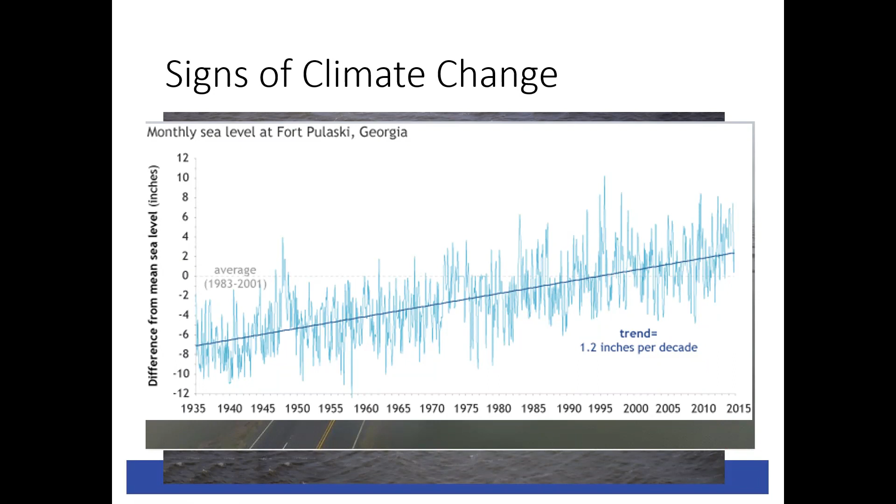So how do Kevin and I and the research teams that we work together, what is our goal? Our goal is to engage the community by taking a look at some of the modeling and geospatial modeling we're doing of their communities related to flooding and hurricane winds within their communities, bringing that back to the community and talking about solutions. How can we potentially mitigate against these hazards that we're modeling through mitigation projects, through resilience actions, so that their communities are resilient going forward in the future.

We then always bring the education back to the community, talk to them about how we did the modeling, what do the numbers mean, how can you then use the information going forward, and trying to educate the community on how we've put this information together. And then come up with best practices. What are the things that are going to be best utilized to help mitigate these risks into the future? What are things to do today? What are things to be thinking about as you grow as a community going forward?

So in phase 1 of the research, there was an initial hazard assessment along the Georgia coastline, and we collected some data for hazard and building data there. And what we learned from that research, we brought into the phase 2 piece, where we looked at current hazards and risks to the Georgia coastline. Then we looked into phase 3 after what we learned in phase 2.

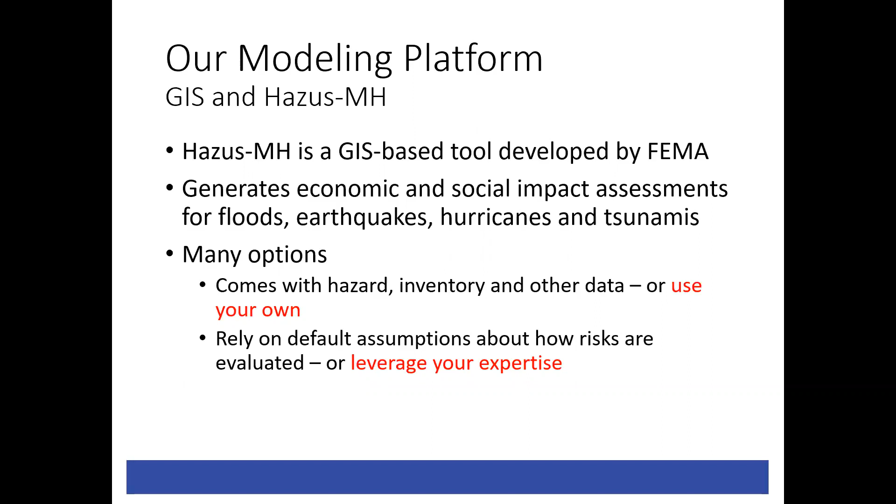Also, in order to really understand the full risks to a community, you have to understand a little bit more about what's impacted. So the buildings, the people, and so you can also use your own information on buildings and people and bring that into HAZUS-MH. So, well, what is at risk? Well, certainly we understand buildings would be at risk, and infrastructure, the environment can be at risk, and also populations.

And so when you're wanting to describe what's exposed to a hazard, you really want to know the questions you're asking, the availability of the data, and the capacity of our modeling tools and techniques. So for this project, we really focused largely on the buildings and infrastructure because we have very, very rich data along the Georgia coastline for those two aspects. And also the relationships between flooding and wind and how those impact those two. And also we looked at populations for our project.

So how did we create our buildings for this project? We used CAMA data. So this would be data that we often get from a county assessor within a community where we are tracking buildings and properties throughout the community, and we can grab building characteristics from that data. So we also have to then locate those buildings in space. And so for some communities, you may only have a parcel footprint, or the land ownership footprint, whereas in other communities, you may be able to locate that right and directly on the building.

And so from this information, we can get things like the name of the building. So maybe this might be a gas station, or it could be a grocery store, restaurant. The occupancy type, single family residential, the number of stories that the building has, and then of course the replacement cost. So in order to fully understand the impacts to any particular building or group of buildings, we have to have a little bit of understanding about the building itself in order to understand what the full impact will be.

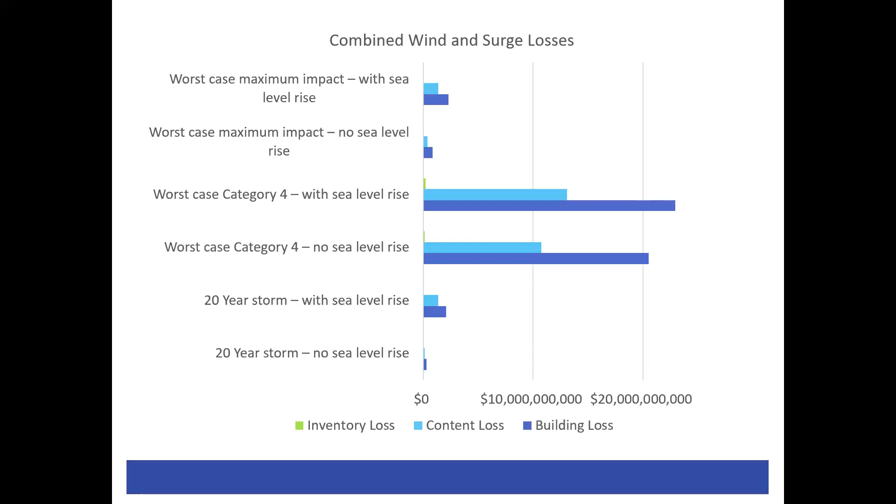When we look at the Category 4 hurricane, because it's impacting the coastline so severely, and you're getting all 11 counties impacted at almost a maximum level, it had the largest impacts, and those impacts were up around $20 billion in terms of that hurricane. So it'd be a devastating hurricane for the Georgia coast, whereas the Category 5 and Category 2, in the way that they approach the coast, were on the lower end, say somewhere between $2 and $4 billion for those two hurricanes.

So the reason that we started with this as an initial assessment, the issue with these types of assessments is they don't really drill down and get to the specifics of what any one community is going to be facing. Certainly you would understand what's happening in those communities right along that Category 5 path, but what about the communities to the north or the communities to the south? Those communities wouldn't be expecting Category 5 winds, they'd be expecting something much lower than that because they're further away from the hurricane path.

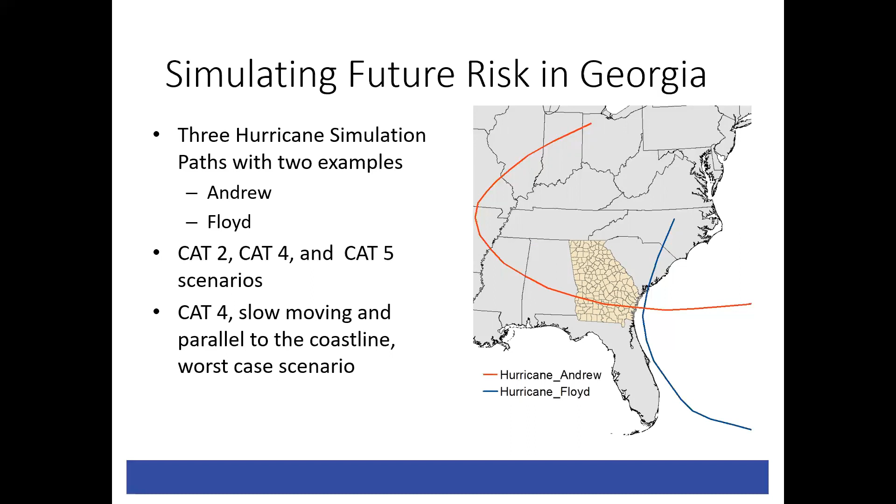And so in phase 3, we focused specifically on Tybee Island and Hinesville. And we wanted to look both at the current day risks from flooding and hurricanes in phase 2, and then future risks for Hinesville and Tybee Island in phase 3. So we developed a strategy for modeling the present day riverine and coastal flooding hazards, and then modeling also the impact of hurricane winds. We focused on riverine, or river and stream flooding, for the Hinesville area, and then coastal flooding and hurricane winds for Tybee Island.

And then we wanted to look at green infrastructure potentials for flooding scenarios, and then building mitigation scenarios for wind, so we could see what the impacts of those actions would be on both current hazards, but also future hazards. And so Hazus-MH, in conjunction with GIS analysis, were used to develop these hazards.

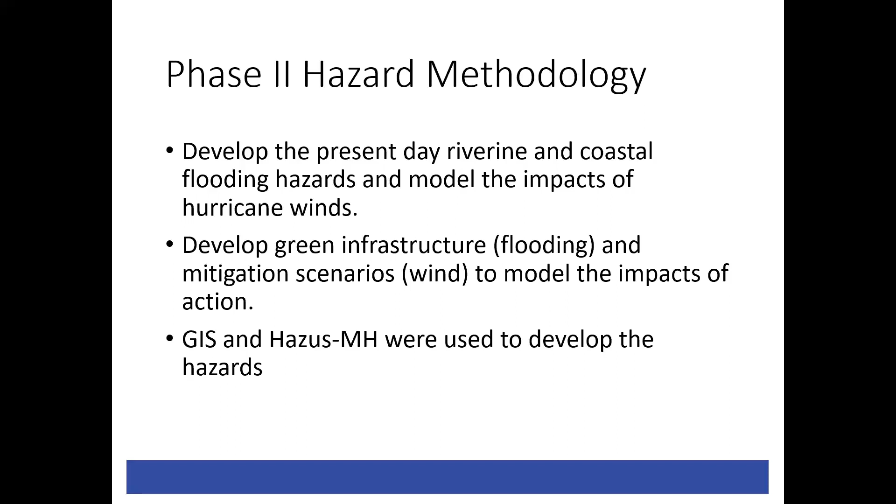So for Hinesville, in terms of the green infrastructure piece, we looked at just retention of about 10% of the existing water. And then we recalculated the stream flow. So what we're simulating here is not any one specific green infrastructure project, but the projects that would be implemented would retain about 10% of the existing water.

For Tybee Island, our green infrastructure project was simulating developing an 8-foot dune, which was the current, at the time, strategy for Tybee, was to have a dune that was about 8 feet and then had all the measures in place that would be protective for Tybee. An 8-foot dune for Tybee Island, and see what the potential for that would be if that was around the island and reducing the amount of storm surge.

And then for Tybee, we also simulated 10% of the homes would have shuttering on them. After talking with different people within the community, they felt like that 10% would be a reasonable number of people that could potentially, just given some sort of incentive program or just through awareness projects, maybe 10% of people would choose to do some permanent shuttering on their structure.

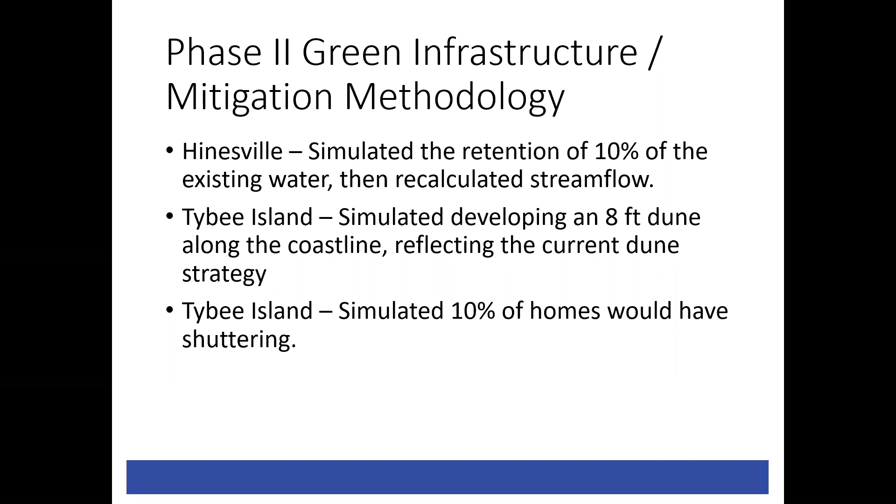So when you're measuring risk, what we're trying to do here is not measure a single event. We're trying to measure statistical probabilities. And so typically we hear of things like the 100-year flood or 100-year hurricane. The better way to describe that is the 1% annual chance, okay? And so the equation for that is if you had one of these happen in 100 years, that means you have a 1% chance of that event occurring. And so we were doing that. We're modeling the 1% chance, 500 years the same way. That's the 0.2% chance of that flood or hurricane occurring in any given year.

So you can have a 1% annual chance flood event in back-to-back years. I know Indiana did that in the mid-2000s, where they had 1% annual chance floods in back-to-back years. It just means that that's the statistical likelihood that you'll have that one flood event or have that one hurricane event. So because of the confusion of the terminology, we're going to stick to using percent annual chance rather than return period, but you can always go back and forth. So anytime you see 1% annual chance in this presentation, think of that as the 100-year flood or 100-year hurricane.

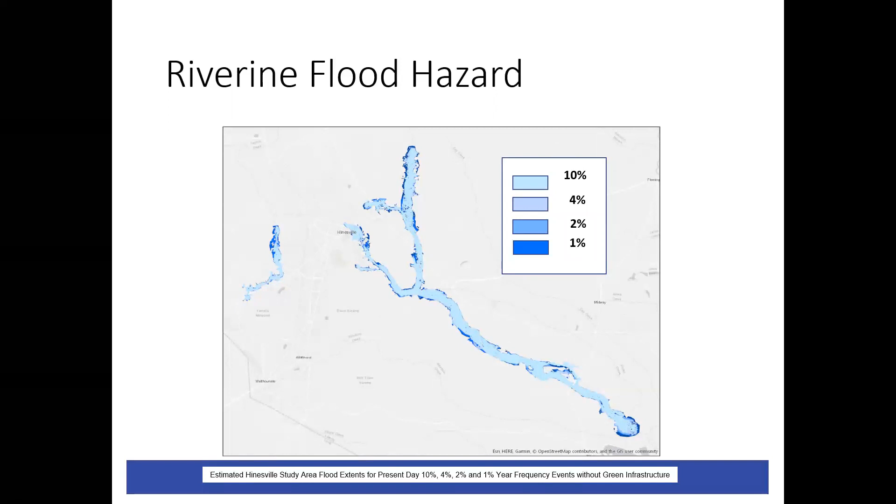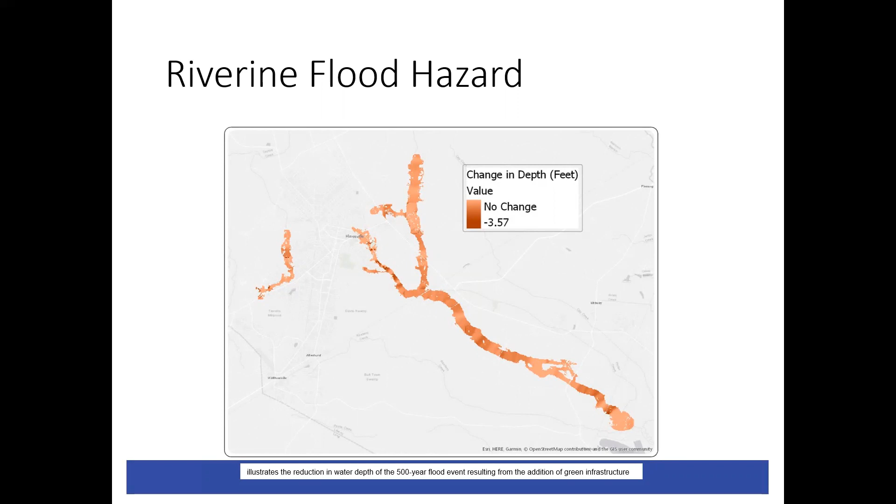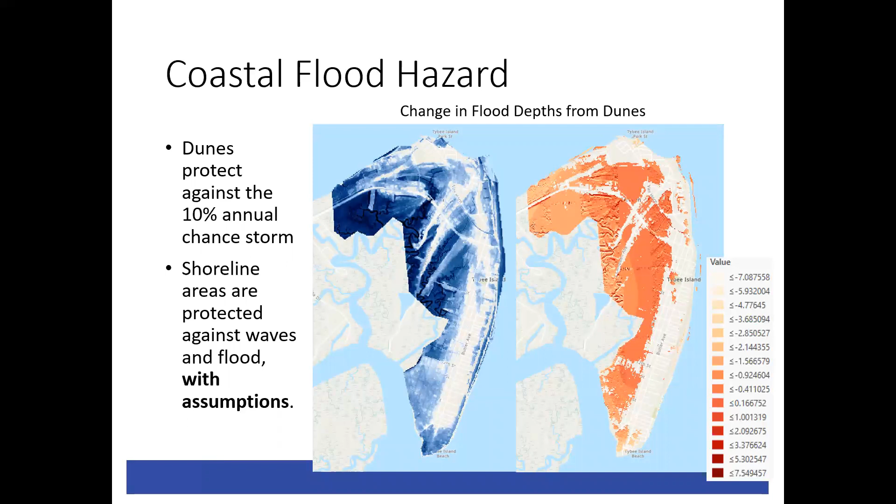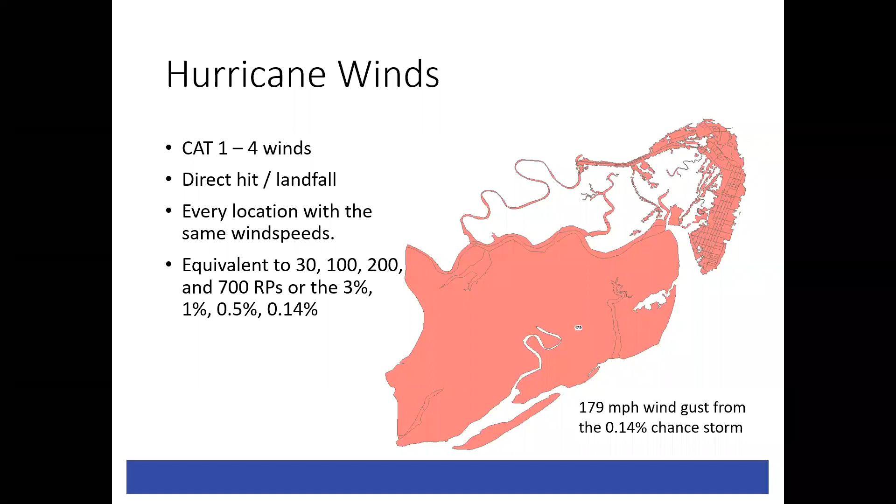So for this area, category 1 through 4 winds actually equates to the 30-year, 100-year, 200-year, and 700-year return periods. A category 4 hurricane for this particular area would be a lower chance event. It represents about the 0.14% annual chance event for a category 4 hurricane. So for the category 4 hurricane, the gusts can be as high as 179 miles per hour. And that's what the gust was, not the sustained wind, but the gust that we modeled for Tybee Island for that category 4 storm.

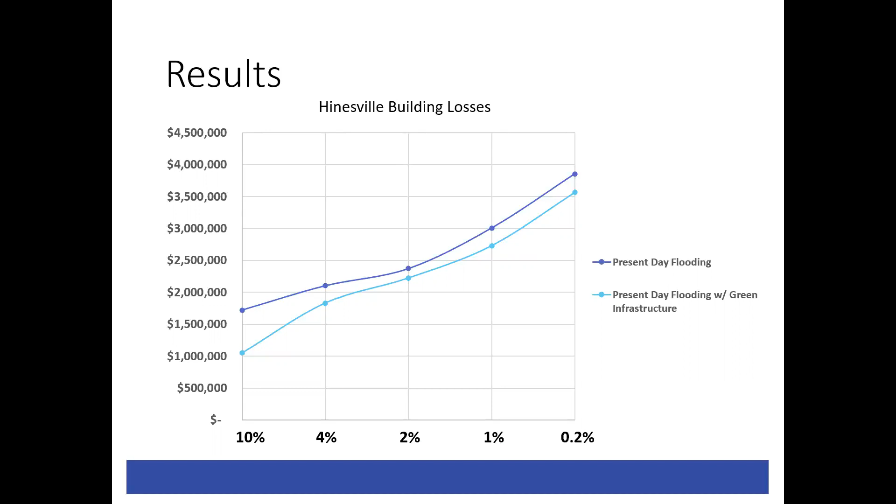We see similar but not as drastic reductions as you go up in the return periods. And partially that's because we're trying to mitigate against these, only removing the 10% of rainfall. When you get into the higher return periods, there's such a high volume of water in those cases, that small reduction isn't quite making as much of an impact as when you're in the smaller return periods.

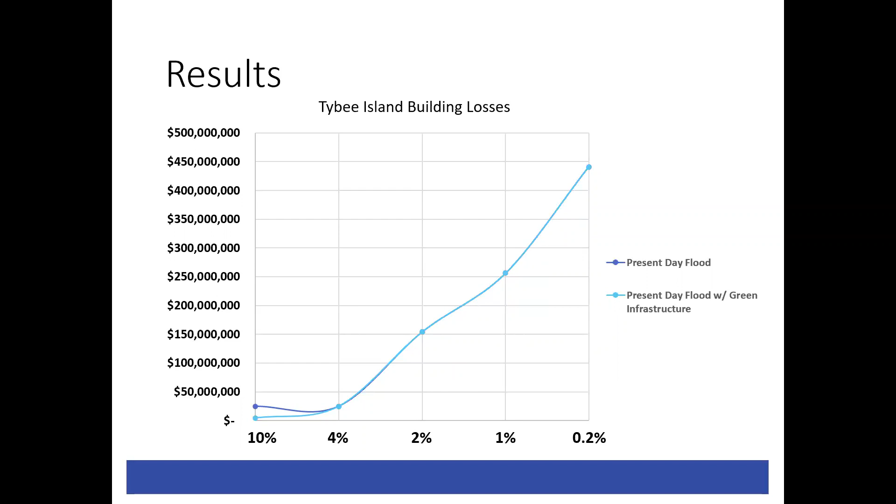So this is the Tybee Island building losses, and you can see that there's been a major reduction in the losses there toward the bottom at the 10% chance. But remember, the dunes are only going to protect against that 10-year storm, or that 10% annual chance storm. After that, the 8-foot dunes, the water is going to begin to overtop those. And so when you get to the 25 and 50-year return periods, 4%, 2%, those dunes are no longer going to be able to protect against those storms. And so at 8 feet, you're going to see the same present day flood with the green infrastructure. You're going to have similar losses in those cases.

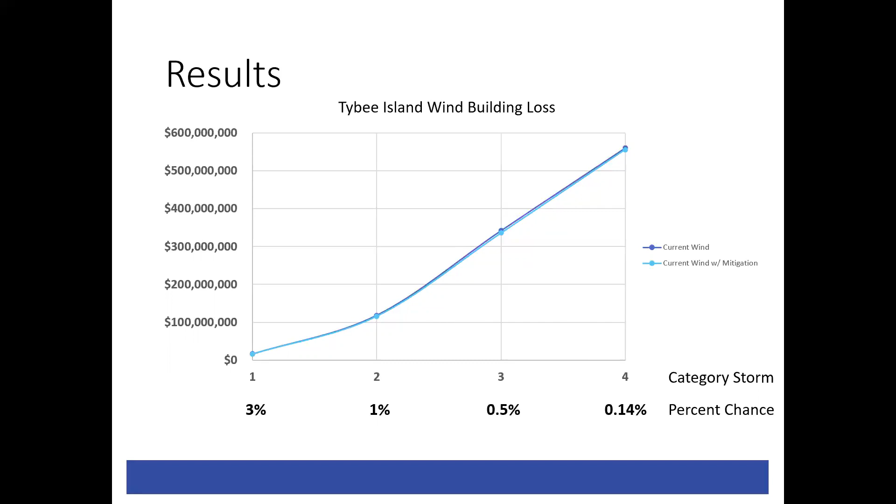Now for wind losses, this figure, because of the numbers that we have here, I'll just go ahead. So we estimated having about 10% of the structures reducing, and you can't actually see the gap there, but 10% of the structures are going to have those wind shuttering on them. And you can see as you get into the higher return periods, those make a bigger difference. In the lower return periods, you don't see as big a difference because the wind damage is not as great. But as you get into the category 2, category 3, and then the category 4 storm, you see what the benefits are from having the shuttering because the wind speeds, of course, are going to be so much greater.

So riverine flood damages remain the same throughout the flood magnitude, but the losses are going to increase as the flooding increases. So what we're saying there is the boundaries were remaining about the same. There wasn't much expansion into the floodplain as we increased the flood magnitude, but the flood depths were changing dramatically across the floodplain. And so we can see those flood depths getting deeper and deeper, and that's why the riverine flood damages are then changing throughout time.

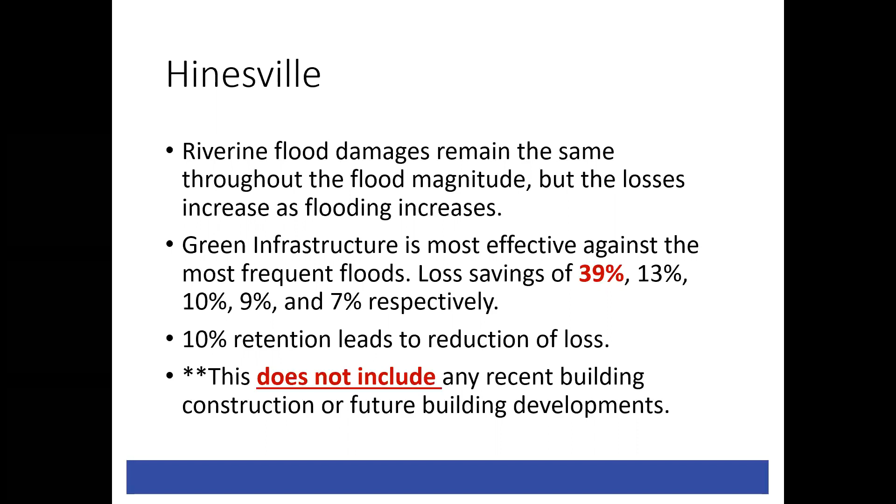The green infrastructure was most effective against the more frequent floods, so the 10%. With the 10% annual chance flood, we had a 39% reduction in loss. The reduction goes down, of course, as you get into the higher flood events, because there's just so much water that's there. So even at a 10% retention, we're seeing some pretty significant loss reduction, especially on that lower return period. We do not have any recent building construction or future building developments in this analysis. This is just the current building states that we had at the time of the analysis that we performed.

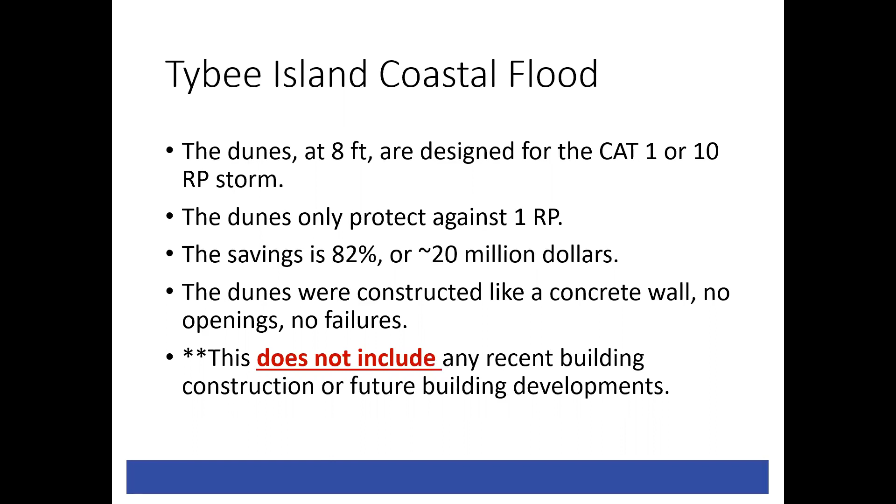So the dunes at 8 feet were designed for that category 1 or 10% annual chance storm every year. And so it only protected against that one. And so the savings for that one was about 82%, or about $20 million for that storm. So well worth having a nice dune system for that more frequent flood event. The one thing to keep in mind is these dunes were constructed like a concrete wall, basically. We constructed them to say this dune was going to be 100%, would not fail. There were no breaks or holes in it, and there were no failures. So we're showing a perfect scenario in terms of the stability of that sand dune. And again, this did not have any of the recent developments or future building developments. Those are going to be included in our future analyses.

And so 10% of shuttering leads to a minor savings throughout Tybee Island. We have an 11% reduction, 2.1%, 1.7, but that's millions of dollars saved. So even at a 0.8% reduction, the amount of dollars saved is huge on that category four hurricane. The reduction seems small, but it's millions of dollars. You can see that in the figure where those higher return periods, the amount of dollars was quite substantial.

So then in phase 3, this is where we're looking at future scenarios. We did 91 future scenarios between Hinesville and Tybee Island. We took the existing building stock and we looked at that for future scenarios. So what we're saying here is, if we don't do anything to our current buildings, they are sitting as they are, no new buildings, nothing. What do the future hazards look like for those existing buildings?

And then we modeled a future building stock. We said, okay, we're going to be looking forward to 2080. And we want to take a look at, okay, if our communities continue to grow, we want to have a future building stock to show those future hazards alongside future buildings.

We used future rainfall projections from the University of Wisconsin's Climate Center. We also got future storm surge information. We had sea level rise from Georgia Southern that provided to us that we could use in these analyses. We got information on impervious surfaces, current impervious surface area and future impervious surface area. And then we also looked at green infrastructure projects to help take a look at the mitigation potential.

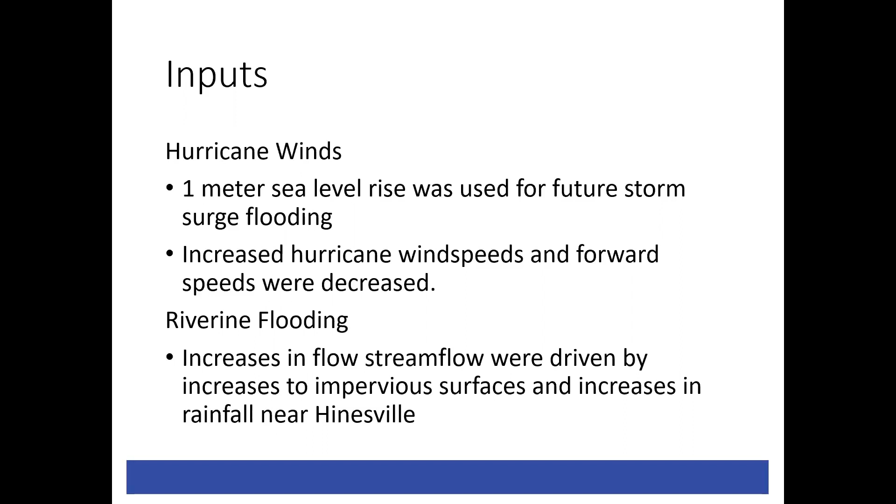We also changed the forward speeds, and we also changed the size of the hurricane based on some of the research that we have today. For riverine flooding, we increased the stream flow based upon what is going to be changed with respect to rainfall in the future in the Hinesville area. We also had increases to impervious surfaces based upon what we believe is a reasonable estimate in the increases in population there within the Hinesville area. So the impervious surface and rainfall changes are what contributed to the changes in stream flow.

So this is an example of the riverine analysis near Hinesville. The blue is today's 1% annual chance flood that we modeled. The pinkish and reddish areas, that's where that flood would expand into the future under our new scenario for the 1% annual chance flood. You can see the buildings that are in green, those are buildings that would be currently within the 1% annual chance flood. And then the purple buildings, those are the buildings that would be added to the potential future flooding that they may see in the Hinesville area.

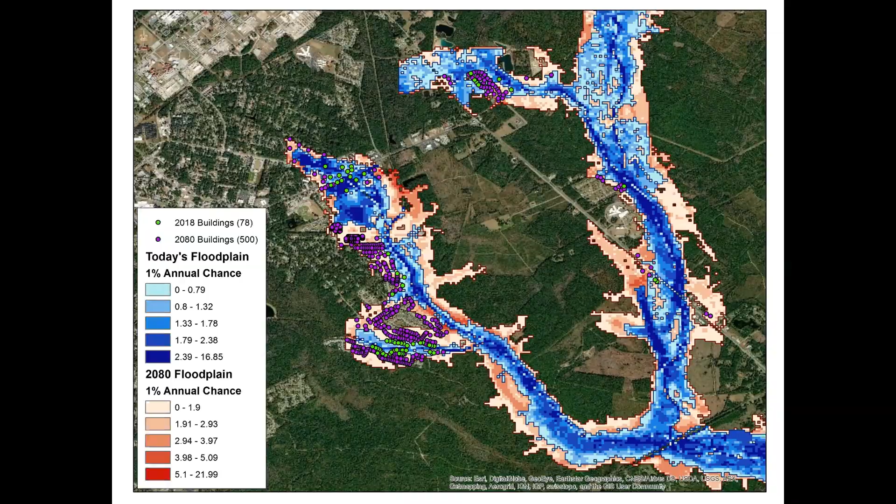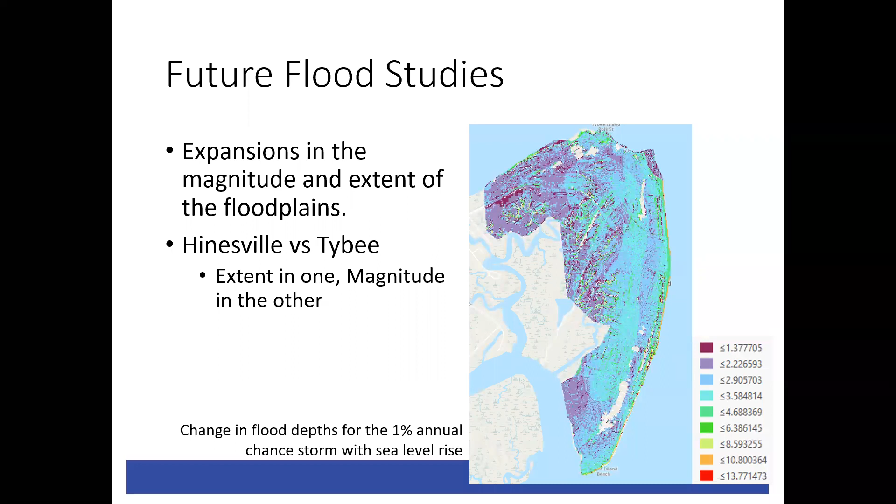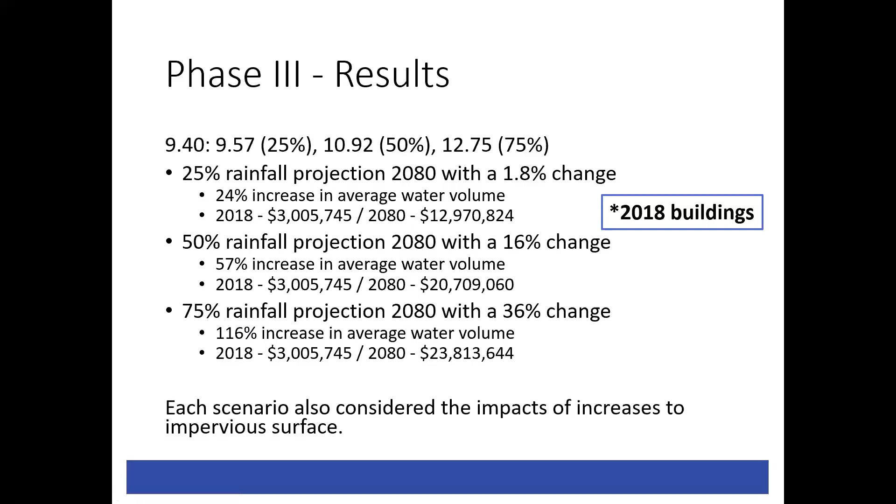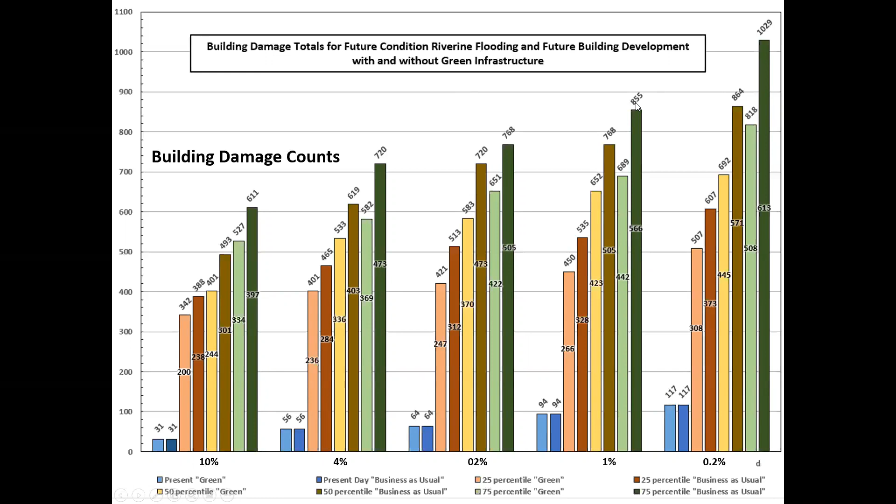And so the two yellow bars here is the same thing, except here we're looking at that middle of the road scenario, and then the final, the light green and dark green, that is the worst case scenario where we're really jumping up the amount of rainfall. And so here, with nothing in place and a worst case scenario rainfall event, 94 buildings jumps up to 855 buildings.

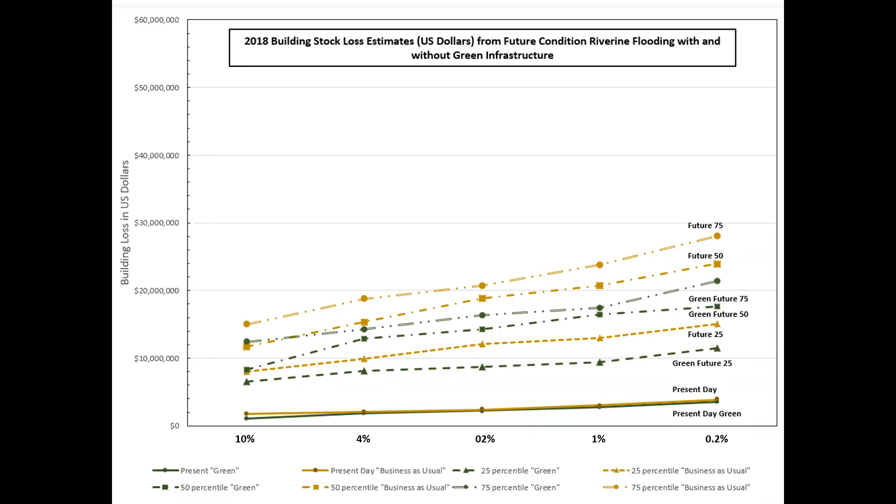Middle of the road scenarios, now we're jumping up into the 20 million, and then the worst case scenarios are up here, getting close to $30 million. So a major change from the $3 million jumping all the way up to $20 million for those areas around Hinesville.

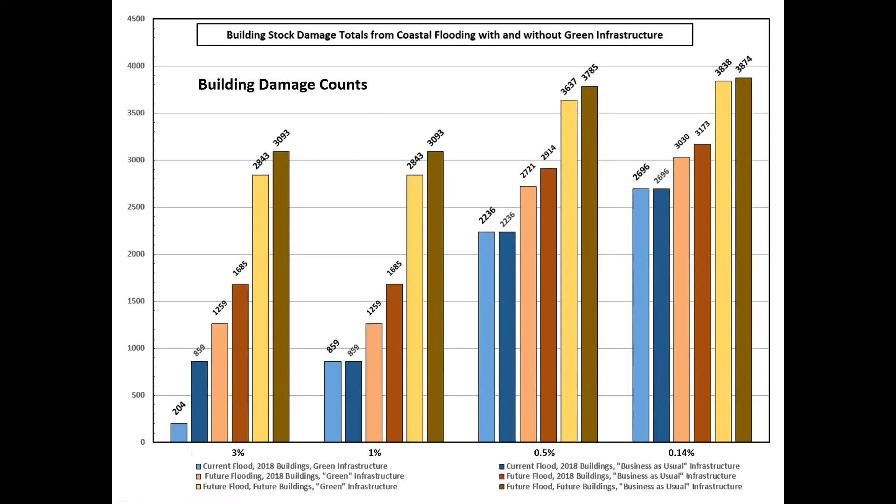This is worst case scenario where we're looking at this coastal flooding. We're going from the 859 buildings with future buildings here. So we're simulating what the expansion on Tybee could be from additional houses or development along Tybee Island. And so we're going from 859 to future hurricane events and building construction on the island there up to 2,800 buildings. So a significant change in the amount of damage.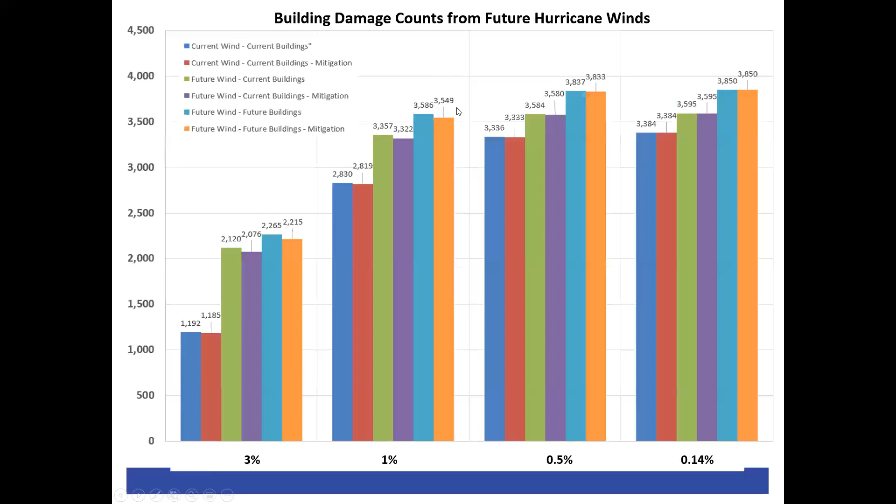And so this is very common throughout the United States. We see it to be more of a problem in coastal areas, and the reason is because a coastal flood is going to impact everything in terms of the storm surge coming on, and it's more of a continuous surface of water. Whereas riverine flooding sometimes is confined to a channel, the storm surge flooding is not confined to a channel.

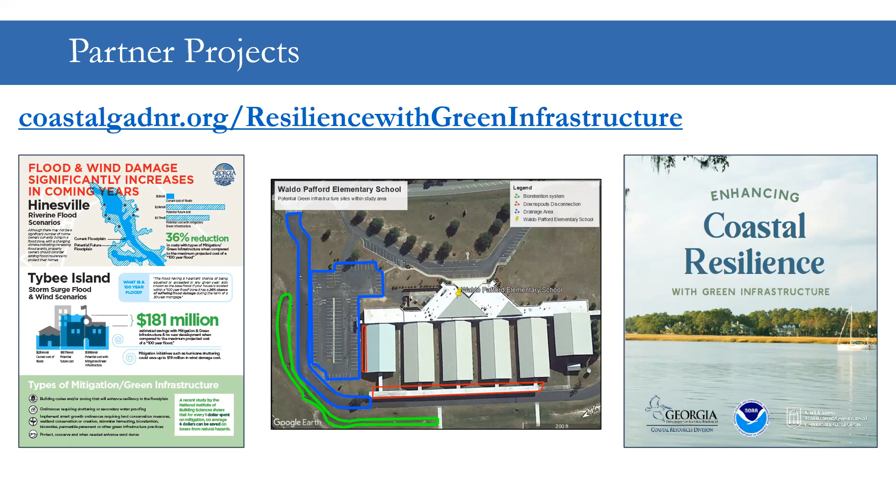And then we're also continuing to partner with Georgia's Coastal Regional Commission, located here on the coast in Darien. They're assisting with data management to help us ensure that we can share all of these meaningful results with communities that are interested in possibly replicating this type of study. The CRC is also working on compiling a lot of these results and tools and resources that I'm showing you now into an online story map. And we hope that this can become a great one-stop shop for accessing data and continuing to learn about this project overall. All right, next slide.